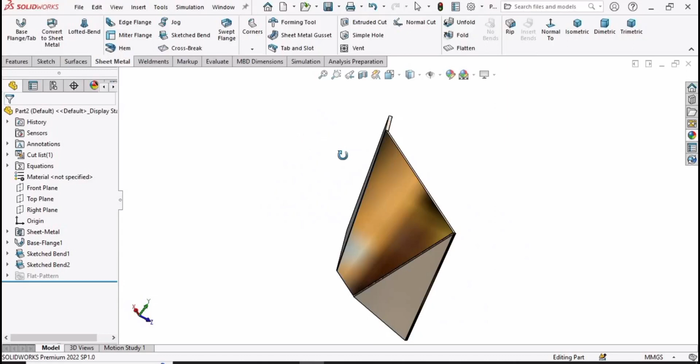Welcome to this video in which we will learn how to make this part by using the sketched bend in sheet metal, and also we will learn how to make this part by using the jog feature in sheet metal. So let's begin. At first, select file, click on new, select part here and then click OK.

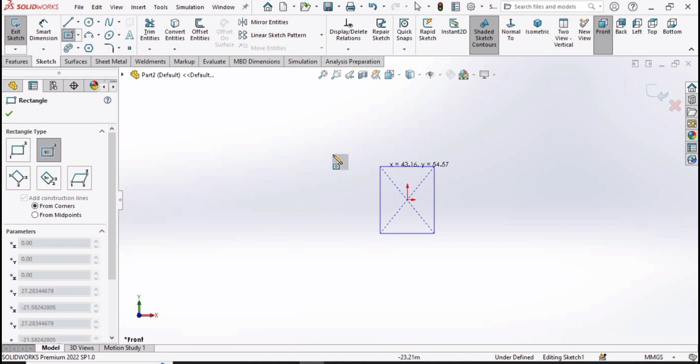Select the front plane, click on sketch. We are going to select this center rectangle, make the center rectangle at this origin. And now select the smart dimensioning tool, specify the length of this side as 250 millimeter. Then select this line and specify the length of this line as 120 millimeter.

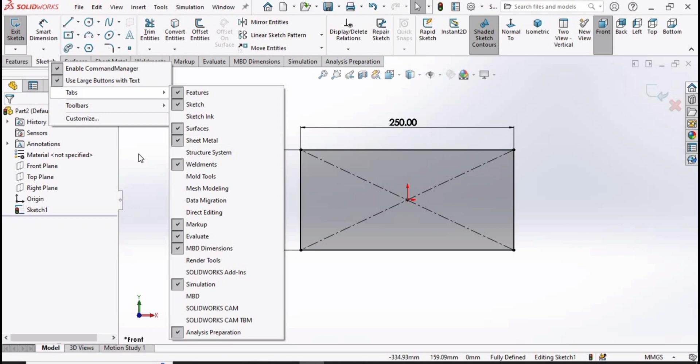Then press the escape button, go to sheet metal here. In case you do not have sheet metal, you can import it from here. Now go to sheet metal, select this base flange option, and here we have to specify the thickness of this plate. So let's specify as 2 millimeter, but 3 millimeter is more appropriate. Now simply check this box

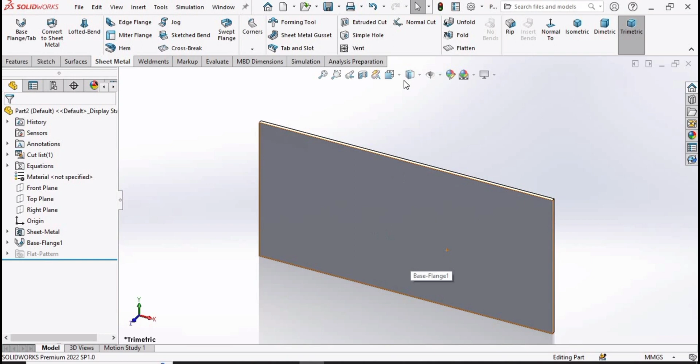and change the background to plain white from here. And now let's define some appearance. You can define any appearance you like. I'm applying this steel, this one. Okay, so now let's select this surface and click on sketch option.

Select the line command, and from this midpoint to any point here make a line. And now select the smart dimensioning tool. From this point to this corner, specify the distance as 45 millimeter.

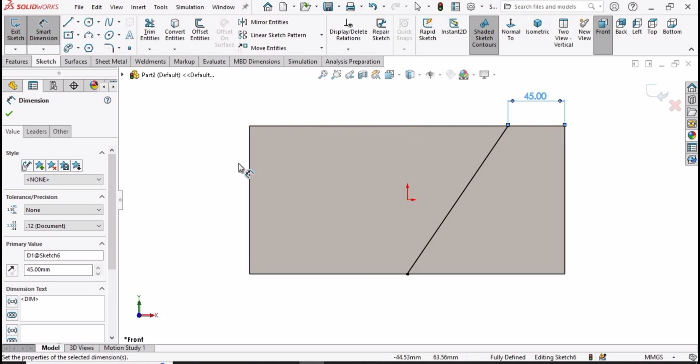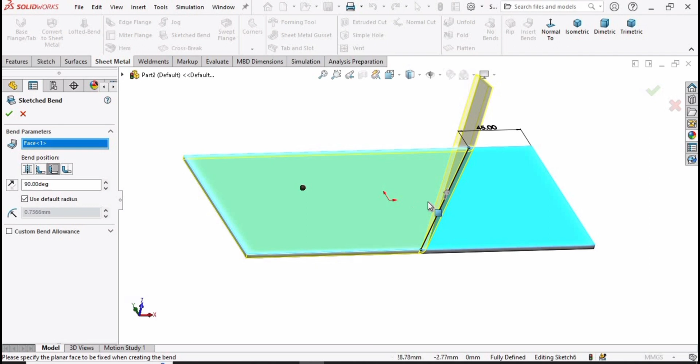And now go to sheet metal and here select sketched bend. In this window we have to select this surface, okay, this side of the plate, and here you can see the bend. So we have multiple options here, this material inside and material outside, and we have this option as well, so you can select any one.

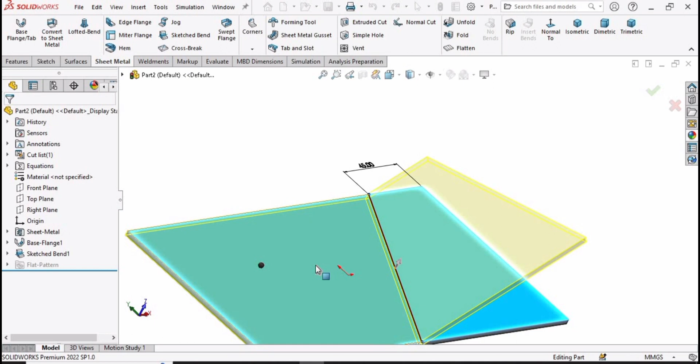And here we can specify the angle of this bend. So let's specify 45 degree. Now change it to 30 degree, and here you can visualize how we can import this sketched bend. So now check this box, and now let's make another bend.

So select this surface, click on sketch. Similarly, make a line from this point to this corner. Now specify the distance from this point to this corner as 75.

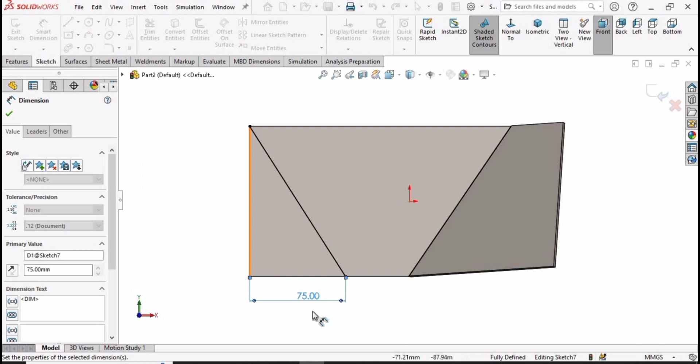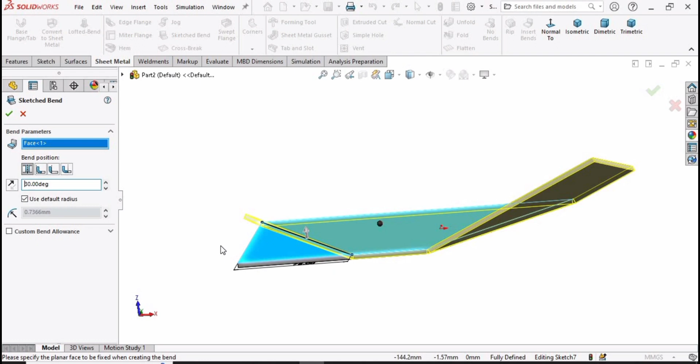Now again go to sheet metal and here select the sketched bend option, and here we have to select this side of the plate, and here you can see the bend. You can specify here any angle. I'm specifying 30 degree for the bend, then check this box. So now apply some different appearance,

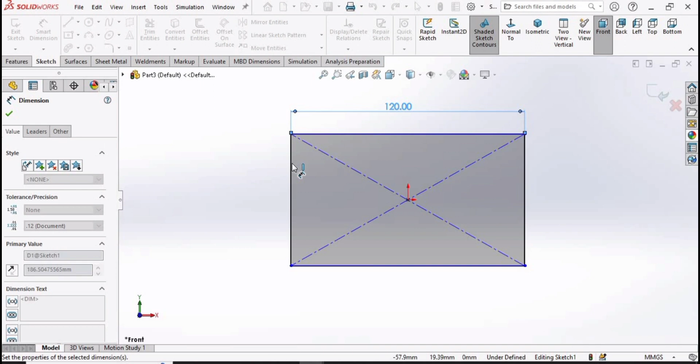and now we are done with the sketched bend, and now let's move on to jog in sheet metal. So for that, open a new part file here, click on front plane, select the sketch option, and here select the center rectangle and make a rectangle at this origin. Now specify the length of this side as 120 millimeter and specify the length of this side as 75 millimeter.

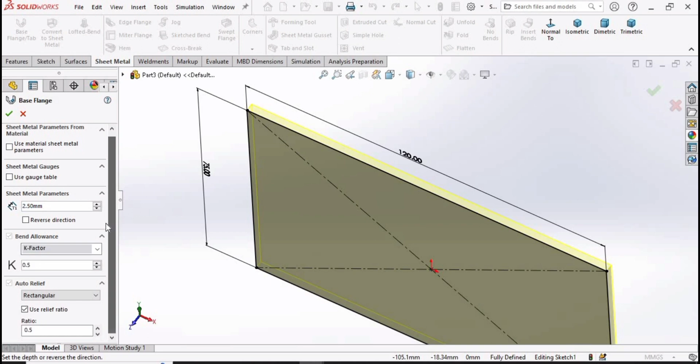And now simply go to sheet metal, select this base flange option, and here we have to specify the thickness of this plate. So specify here 2.5 millimeter, and then simply check this box. Now go to appearance. Here you can define any appearance you like, change the background to plain white.

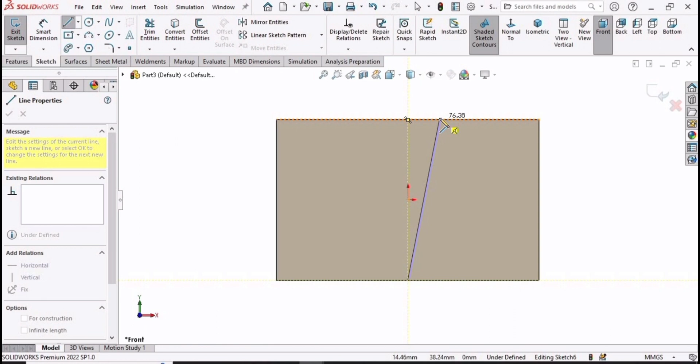Select this surface, click on sketch, select the line, and from this point to any point here make a line. Now select this smart dimensioning tool. From this point to this corner, specify the dimension. So let's specify here 50. Check this box here. Now go to sheet metal and here select jog in sheet metal.

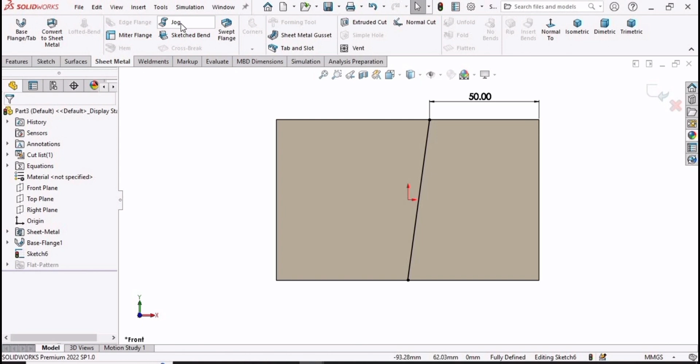In the very first window, this one, we have to select the line we have created. So select this line, and here you can see by using this jog feature we can create this sketch. So we have multiple parameters here. We can change the height of this sketch from here. So specify here 30,

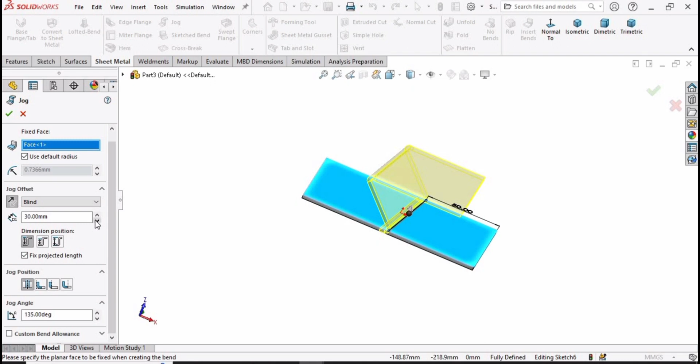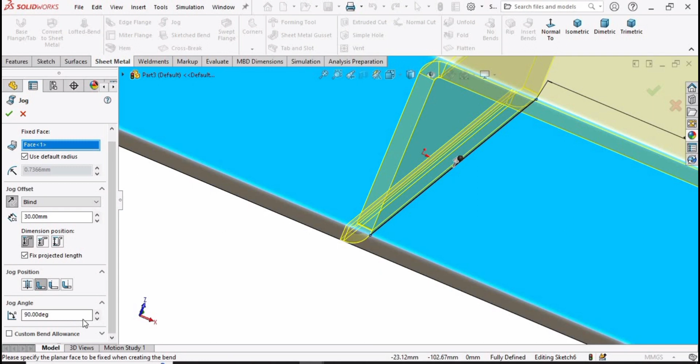and we have multiple options here. You can change the angle from here. So specify here 90°, and now we have multiple options for this profile. This is material in, material out, and we have other options as well, you can see. So you can select any from here according to your design, and now simply check this box from here, and by using the jog feature we can create this sketch.